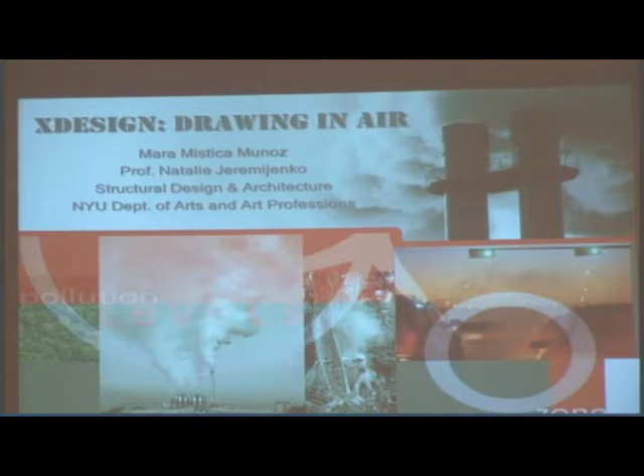My mentor is actually the key component of the project. She's an artist, she's an engineer, she's an environmentalist. She's director of the XDesign Environmental Health Clinic at NYU, and her aim is to bridge a gap between humans and our natural environment through interactive art, technology, and science.

She just wants to use new technologies, and she created this project, this branch from the Department of Arts at NYU, in order for us to use new technologies to actually improve our environmental concerns. So what is XDesign and what is the X Clinic?

She's the director of the X Clinic, and XDesign is actually the bigger umbrella, and X Clinic is under that. XDesign basically means experimental design, and that entails experimental creation to explore the opportunities for new technologies to promote nonviolent social and environmental change.

Like I said before, she tries to instill new technologies and advancements in science in order to improve the environment and environmental awareness.

The Environmental Health Clinic actually runs like a regular medical clinic. It has appointments, impatients, and prescriptions. The only twist is that it addresses environmental concerns. So you don't go in there to discuss your individual medical concerns. You make an appointment with her, and you go in there and address what you think is wrong or what you think you can change about the environment in your local area.

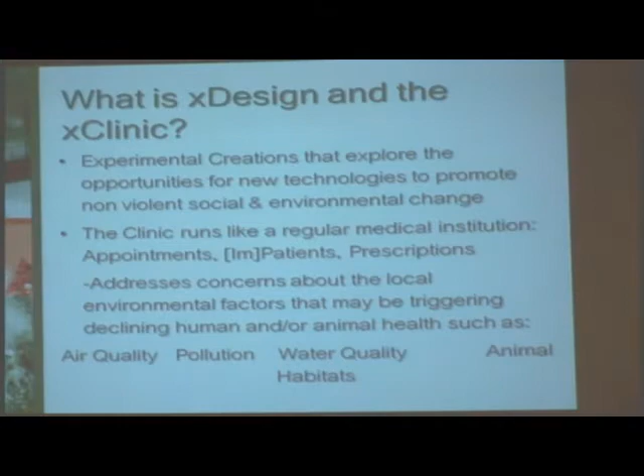Some factors that she discusses with her clients, which are called impatients. The reason they're called impatients is because she calls them that because they're impatient for environmental change in their neighborhoods, and they're tired of local officials saying they're going to improve the air quality and the water quality, but they don't really do much, so they're impatient for change.

Basically, prescriptions - she doesn't give you prescriptions for pharmaceuticals. She gives you prescriptions for actions you can actually take to improve your environment. Or referrals - in a regular clinic, they would give you a referral to a doctor or a specialist. Here she gives you referrals to organizations and people in charge of environmental awareness programs that can actually help you.

Say a mother goes in there and her concern is that her child gets exposed to lead paint. What she would do is take her appointment, go see Professor Jeremijenko, and try to find some kind of project where they can improve the lead paint issue, or do something about it.

Her quote is basically, you know how they tell you, in order to improve your environment, save water, turn off this, turn off that. But what she's saying is, what can we do? What is stuff that we can actually do instead of not doing things? What are things that we can actually do? That's basically what her clinic is about.

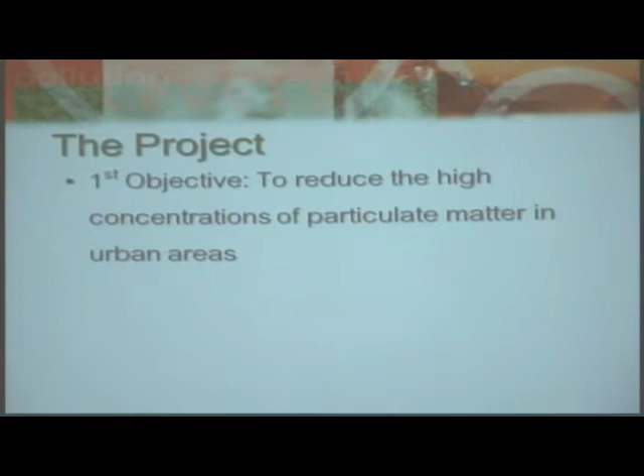So the project I worked on - the first objective was to reduce the high concentrations of particulate matter in urban air. That ties in with the second objective, to improve air quality in urban areas through inexpensive and immediate means.

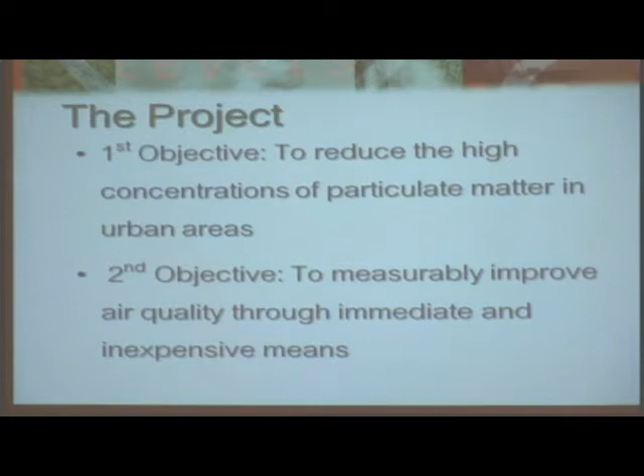She wants projects that normal, regular people who go into her clinic are going to be able to do. So if somebody went into her clinic and asked her, I want to improve the outdoor air quality because I have asthma or another respiratory disease...

This would be her prescription - I'm going to go into what the project is going to be, to improve the air quality and how we're going to do that. So, like I said before, particulate matter - what is it and why is it dangerous?

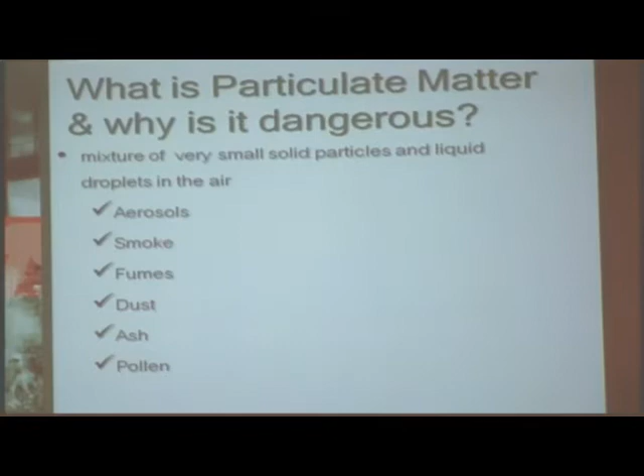Particulate matter is actually a mixture of very small solid particles and liquid droplets in the air. So that includes dust, smoke, anything that can actually get into your system through the pollution in the air.

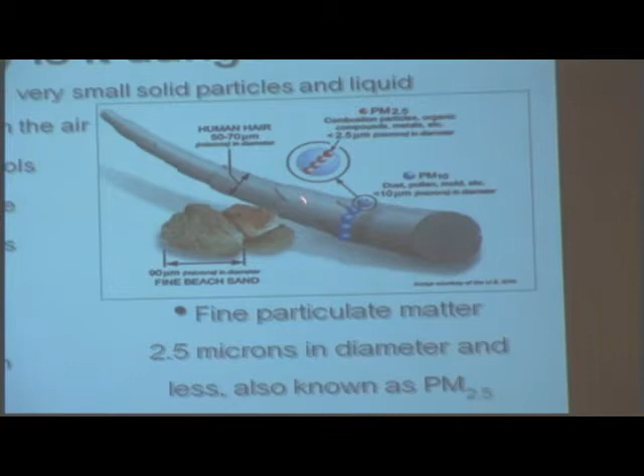And what we were focusing on was fine particulate matter, which is particles that are 2.5 microns in diameter or smaller. So you see the diagram there. This is human hair, about 60 microns in width. This is sand, about 90 microns. And what we're after is this thing right here. You see how small it is? This is very small, either 2.5 microns or lower.

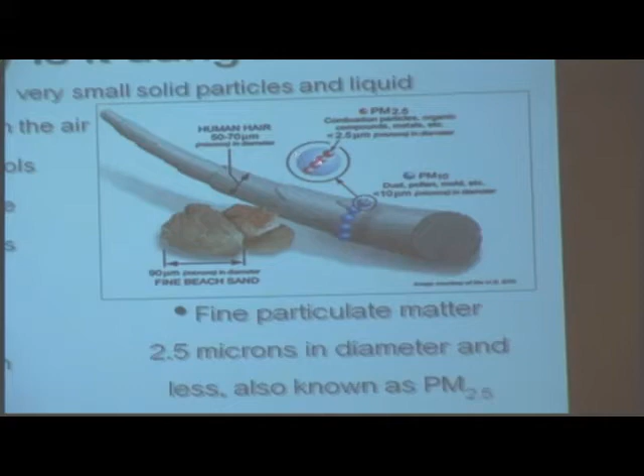This stuff is dangerous because it can get into your lungs. And once it gets into the lungs, it sticks to the alveoli, and the alveoli are in charge of diffusing oxygen into your blood, so that interferes with that.

The main sources of particulate matter are trucks and diesel engines. You see the exhaust coming from that and entering the lungs. The particulate matter coming out is only 2.5 microns, so particulate matter is smaller than this. It goes into your lungs, entering the air sacs, and it's basically damaging your entire lung system, little by little.

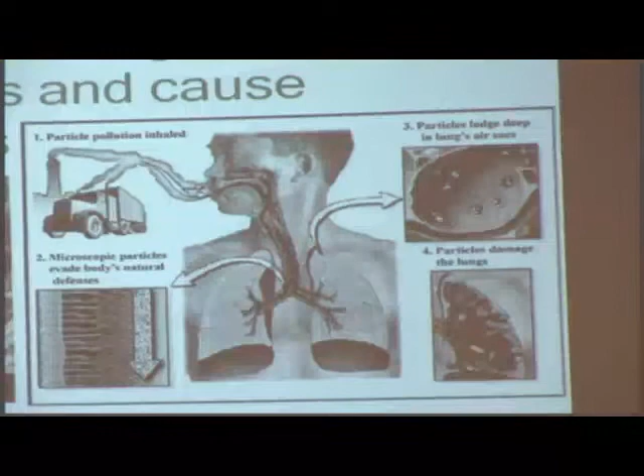This is actually why you see a lot of asthma rates in places where they have a lot of bus stops or a lot of diesel engines.

So the project I was actually working on to find a remedy for this was called Drawing In Air, filtering out polluted urban air. What we're trying to do is create a passive solar chimney to capture black carbon. When I talk about black carbon, I mean the same things we're talking about, the PM 2.5 particulate matter, the fine particulate matter that gets inside the lungs.

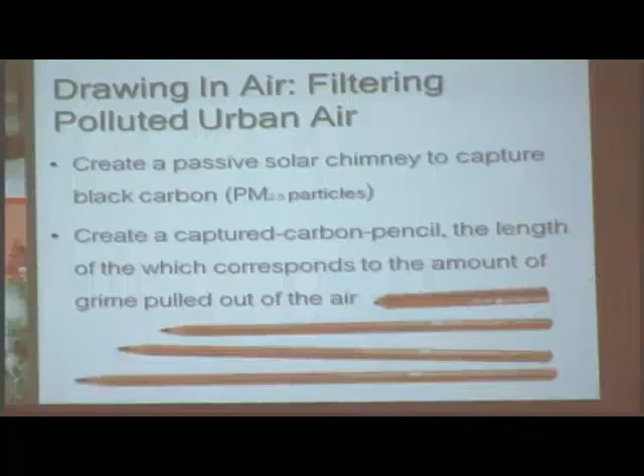Once we capture the junk, the bad stuff in the air, the particulate matter, we plan to make them into pencils. So not only can you measure how much is in a certain area, say we took this amount from an area in the Bronx, we can compare this amount to another area maybe in Harlem. So you can see this pencil made from the particulate matter is actually bigger, so you can tell there was more pollution captured here than here.

My job was basically to research potential sites for the chimney and possible sponsors who would help fund the project. So when I researched, I found out that East and Central Harlem had really bad asthma rates because of bus depots and diesel engines, South Bronx too.

For every 4 children in Harlem, there is 1 child that has asthma. And a lot of studies show that it's actually due to what the professor is trying to fix, the pollution from the diesel engines and all of that.

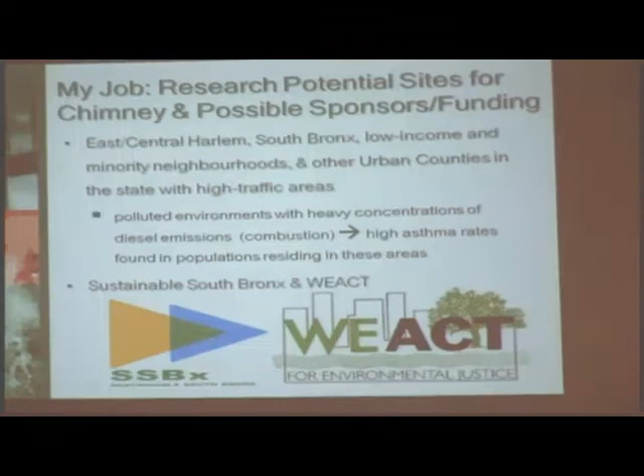Sustainable South Bronx and WEACT were two environmental organizations. WEACT is an environmental organization for Harlem, and Sustainable South Bronx is for the South Bronx. They aim for environmental justice, so they want to fix air quality and water quality in these areas, and they do a lot of projects. We think these are probably organizations that would be interested in funding the Drawing In Air project.

So the chimney, how exactly is the chimney going to be? She hasn't exactly started working on it. She still has the visualization.

So basically, she did this little visualization. This is a regular building. You can see the south face of the building.

What she wants to do is cover this with the chimney. When I say chimney, you mostly think of a tube or something, it's just called chimney because of the shape of it. Basically it'll end up covering this whole side of the building. When the air filters through it, the air will go inside through the bottom and come out filtered, because the particles are actually getting trapped in the filter.

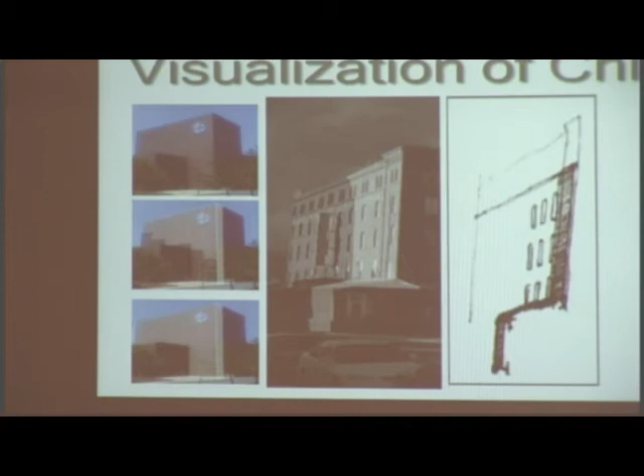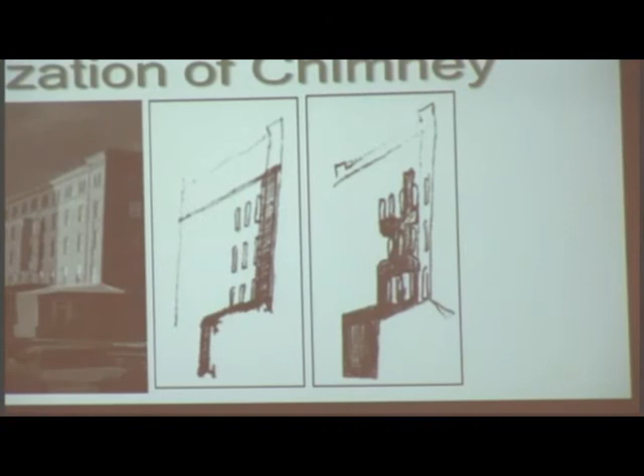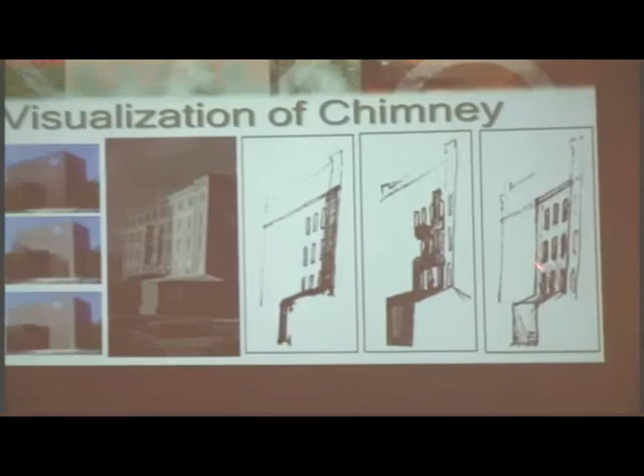This is another building. The shaded area is what she's trying to show. If she wants to cover this building with the chimney, there are 3 ways she can do it: a tube just going down, put the plastic from upward to downward, or she can maneuver and design the chimney to go through like the drawing entails. This way to design the chimney is actually right here, so you cover the whole side of the building.

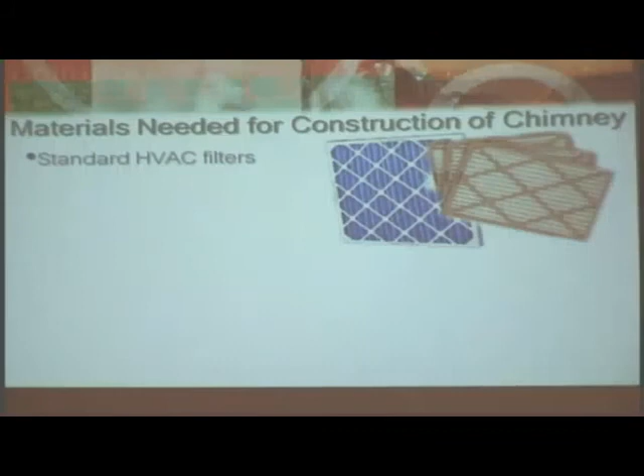The materials needed for the chimney: these are the filters, standard HVAC filters to capture the particles in the air. Also a large piece of greenhouse plastic, polyethylene, pallet wrap, or other plastic.

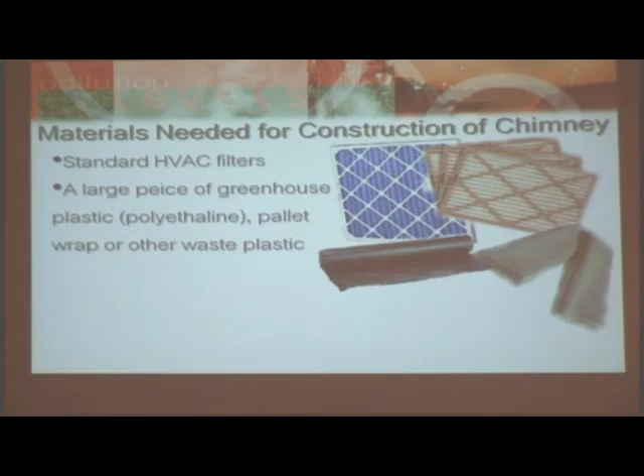So what she aims to do is use the greenhouse effect to address the greenhouse effect - all this bad contamination getting into the air. She wants to use simple tools like this. You can get this from an HVAC store, or regular plastic, and you can actually try to make this, because she wants it so that all her clients can go in and construct this chimney themselves. Like the greenhouse effect, I'll explain it later with another diagram, but also obviously we need access to a south-facing building.

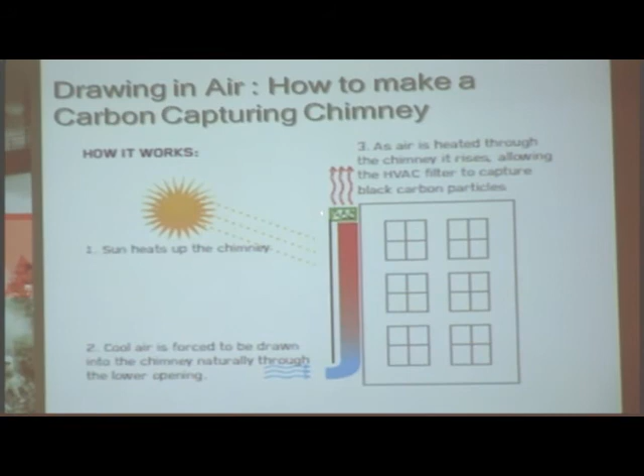So this is the diagram I was talking about. How it works is the greenhouse effect: the sun heats up the chimney, which is why it's called a solar chimney. The sun heats up the chimney, the air naturally going through it heats up, so the hot air rises due to the greenhouse effect, due to the plastic used to make this part of the chimney. Then the air goes through the filter, and the idea is that the particles get trapped here, so the clean air continues to go out - well, not clean, but with less particles. So that's basically the idea of the chimney.

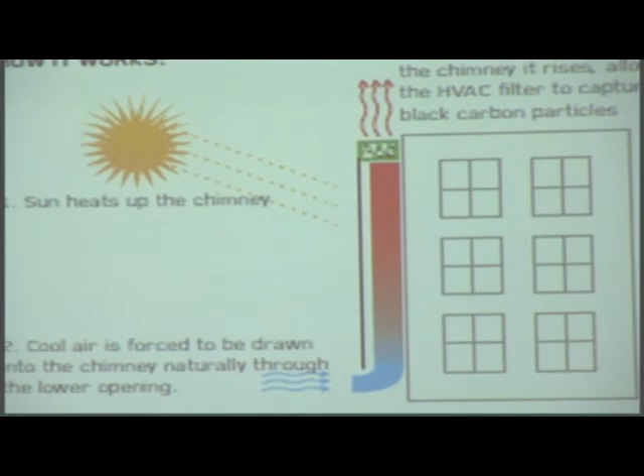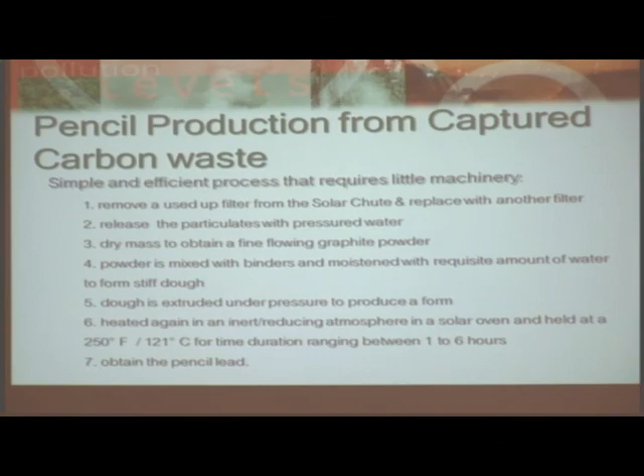Once that is done, to create the pencils we're going to take the gunk from the filter and use a simple process that doesn't require much machinery. First, we remove the filter, exchange it for a new one, and send it to the X clinic. That's all the person has to do.

Then at the X clinic, they will release the particles with water by running the filter through water. Once they have the particles, which are probably wet, they'll dry them and convert it into a powder. Once you have that powder, they mix it with binders and moisten with the requisite amount of water to form a stiff dough. Then you use that to form the shape of the lead, and put it into the solar oven.